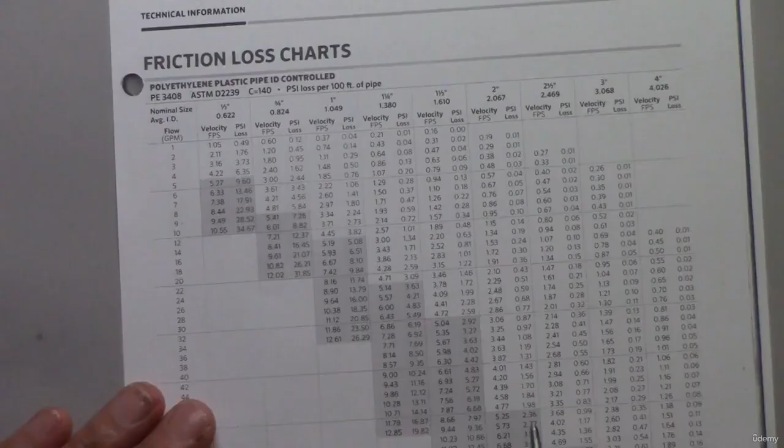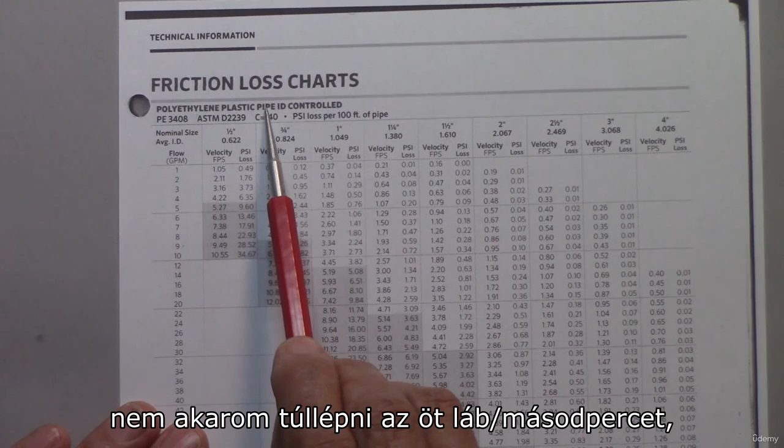Okay, let's look at these charts. So here we have a friction loss chart, and this is for polyethylene plastic pipe, or just drip tubing. What this is telling me is what I can do as far as velocities. I don't want to exceed 5 feet per second, and what my PSI losses are.

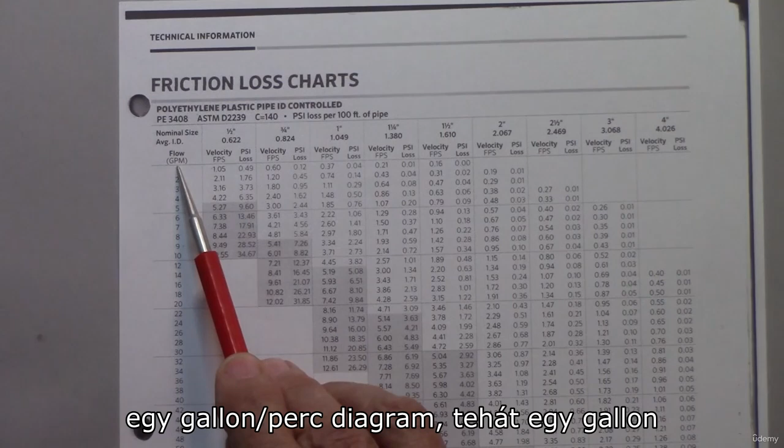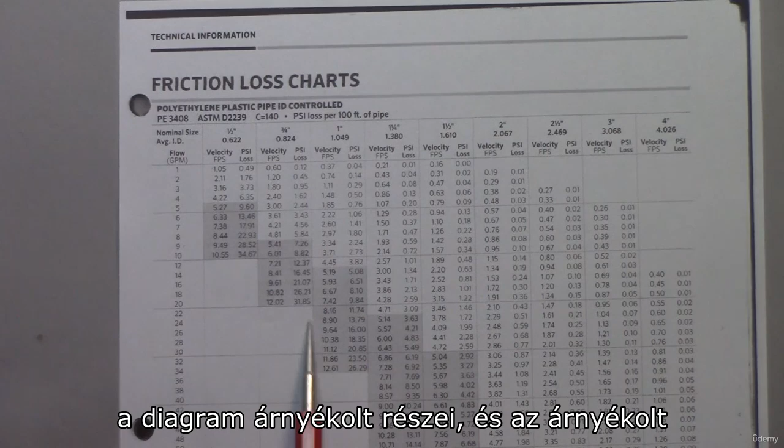So with 1/2 inch tubing, here on the left-hand side, I've got a flow in gallons per minute chart. So 1 gallon per minute all the way down the line. I also have a stair-stepped area of shaded portions of this chart, and that shaded area represents areas where we are exceeding 5 feet per second velocity.

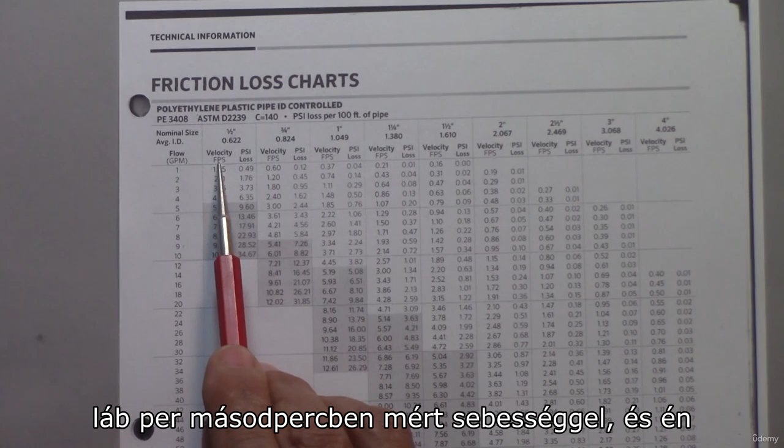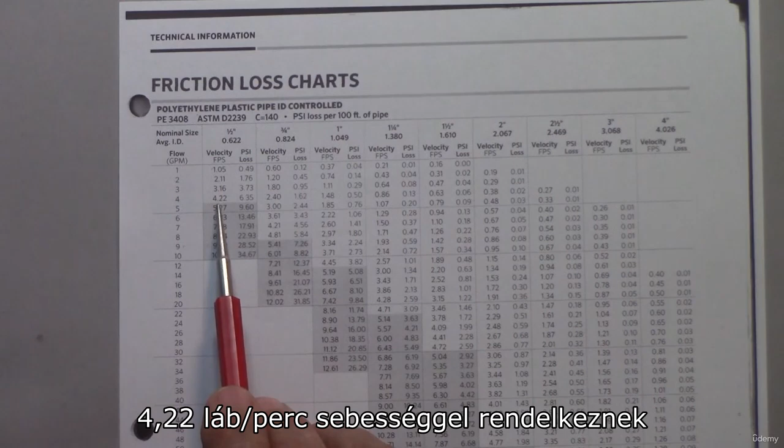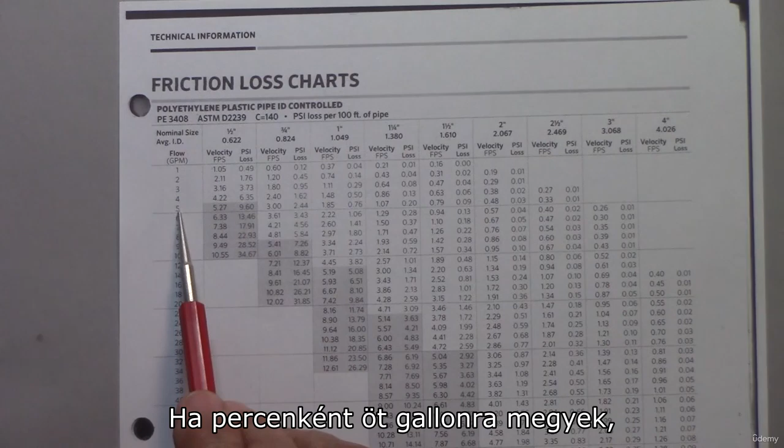So with a 1/2 inch pipe, I've got a velocity in feet per second column, and I've got a PSI loss column as well. If I'm running 4 gallons per minute, which is 240 gallons per hour, I'm going to have a velocity of 4.22 feet per second and a PSI loss of 6.35, and that loss is per 100 feet of pipe. If I go to 5 gallons per minute, I'm exceeding my velocity, so I can't go there.

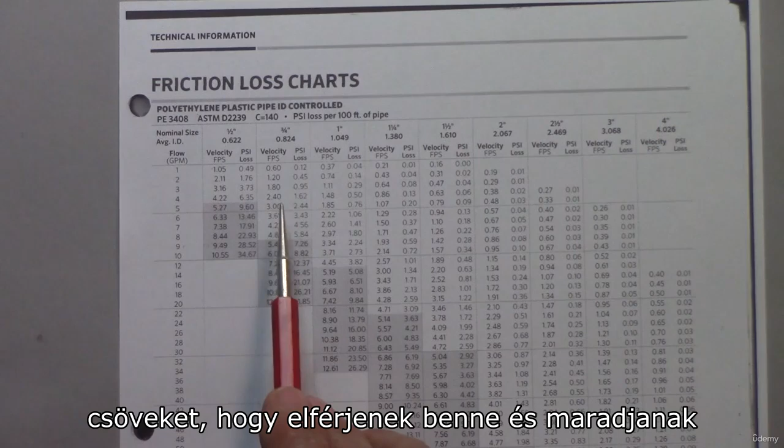If I want to have more than 5 gallons a minute, then I'm going to have to jump to a 3/4 inch drip tubing in order to accommodate that and stay within our design criteria.

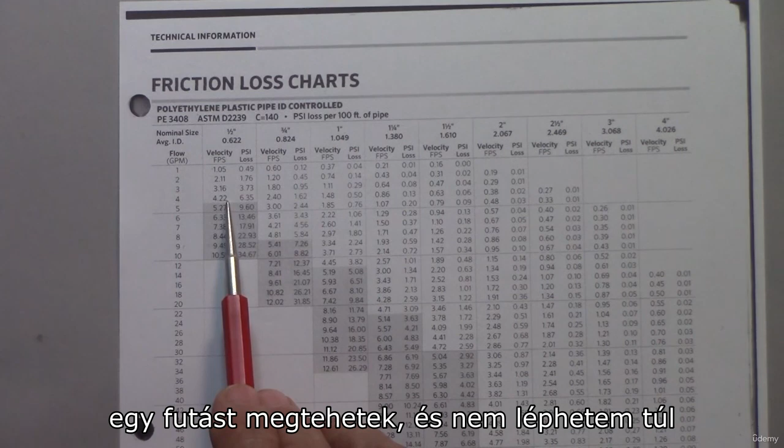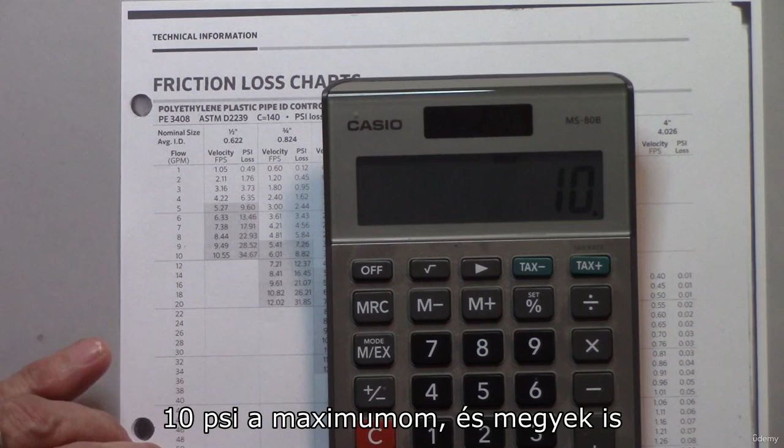So if I'm pushing 4 gallons per minute or 240 gallons per hour, how long of a run can I do and not exceed or max out my 10 psi loss? Well, I'm going to take my calculator. 10 psi is my maximum, and I'm going to divide that by, at 4 gallons per minute, a psi loss of 6.35.

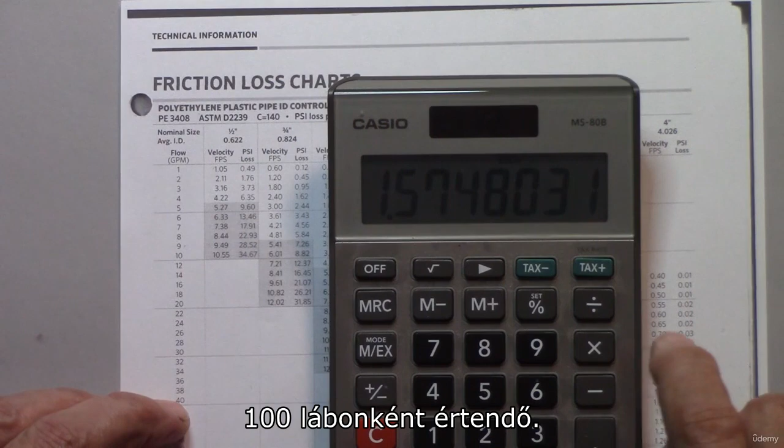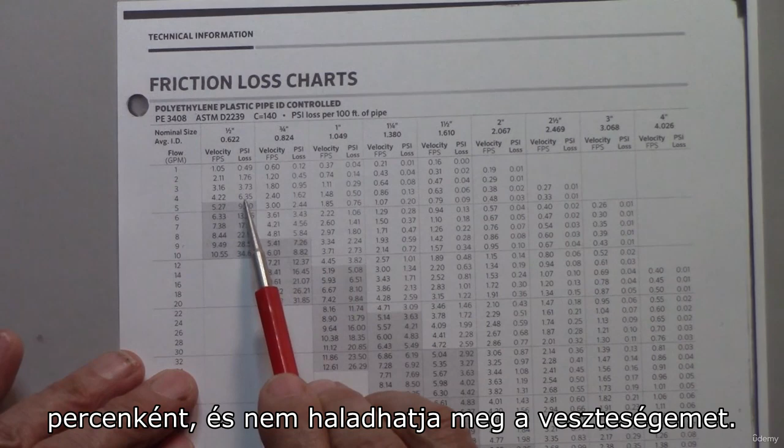It gives me a value of 1.57, but remember, this is per 100 feet. I multiply that, I can run 157 feet at 4 gallons per minute and not exceed my loss. So that would be the maximum I could do at 4 gallons a minute with 1/2 inch piping.

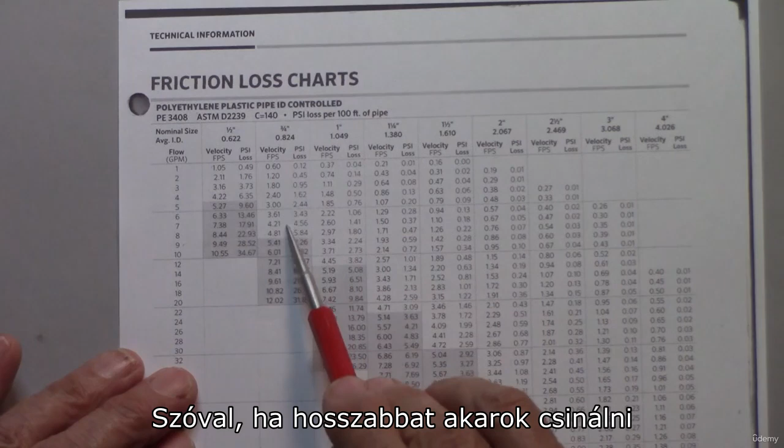So if I want to do a longer run, I'm going to have to go up to a 3/4 inch pipe.

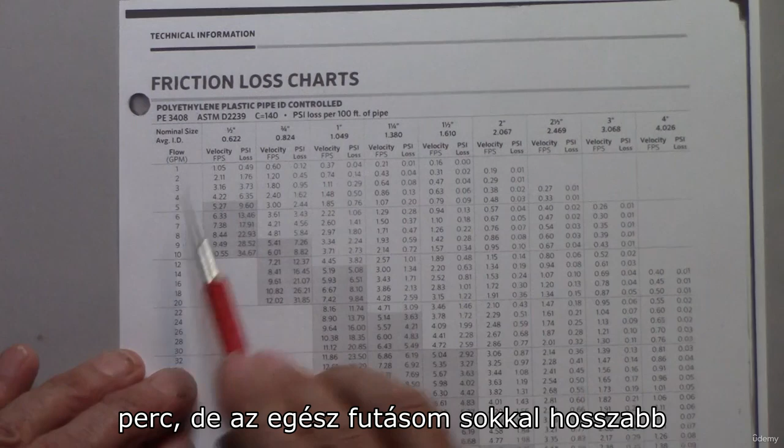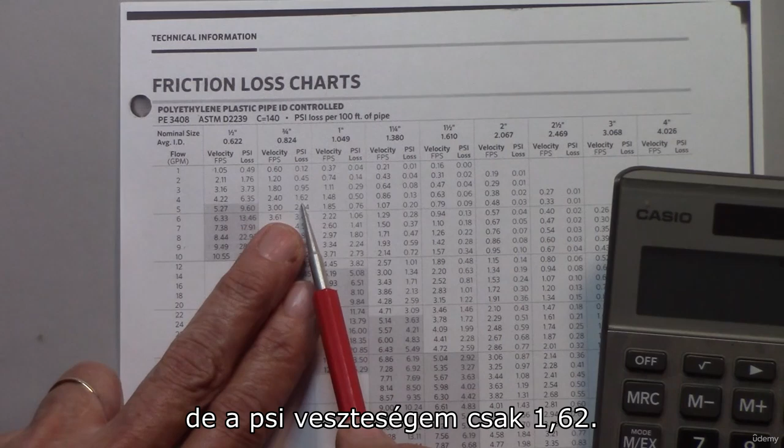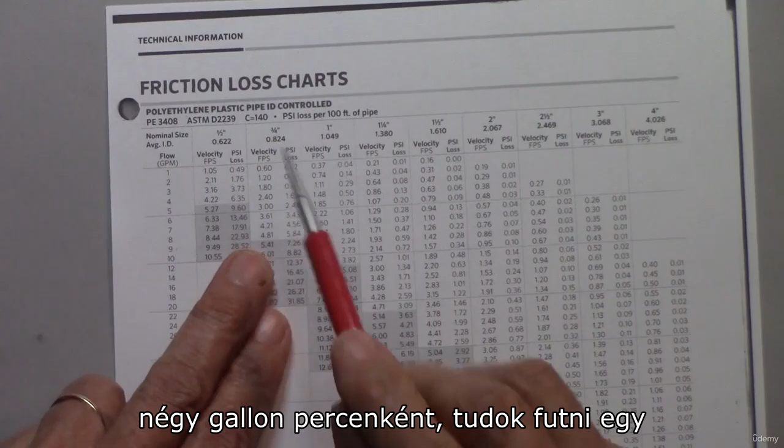So let's say I'm pushing 4 gallons a minute, but my whole run is much longer than 157 feet. Well, at 4 gallons a minute on 3/4 inch line, my velocity is 2.4, but my PSI loss is only 1.62. If I do the math again, 10 divided by 1.62 times 100, I can run a 3/4 inch line 600 feet, almost 620 feet, and I'm going to be fine as far as my friction loss is concerned and putting my system together.

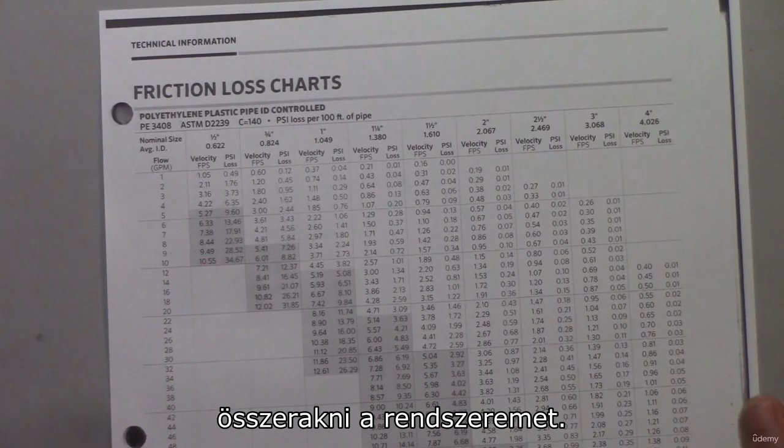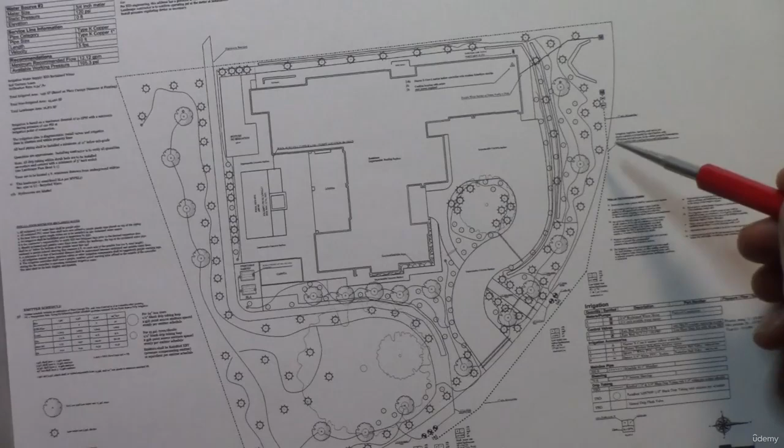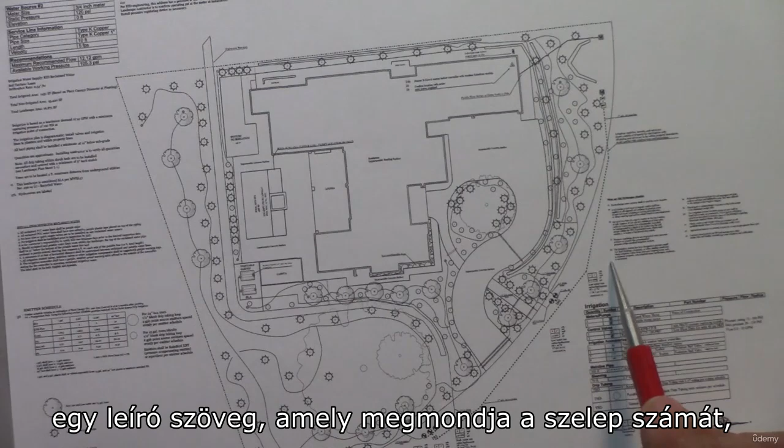I've got a 1-inch Schedule 40 main line shown coming out. I've got 5 valves depicted by these little semaphores, and my maximum gallon per minute flow rate is 4.37 gallons per minute. So near each of the valves, I've got some descriptive text that says the valve number, the valve size, and what the gallon per minute flow rate is.

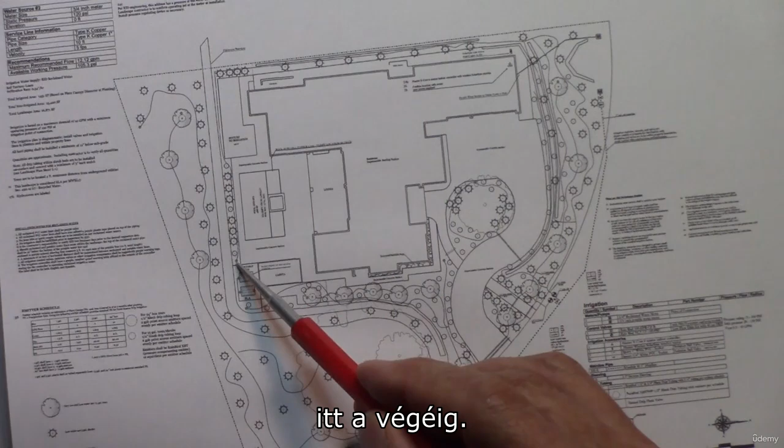So if I need to size this, now this little line coming out represents my drip tubing. And this drip tubing comes all the way around, all the way down, and down to the end here. That measures 331 feet. So I've got 331 feet and 4.37 gallons per minute.

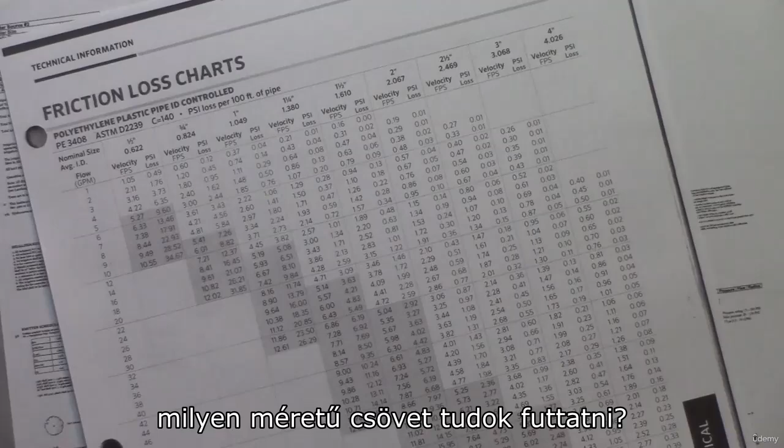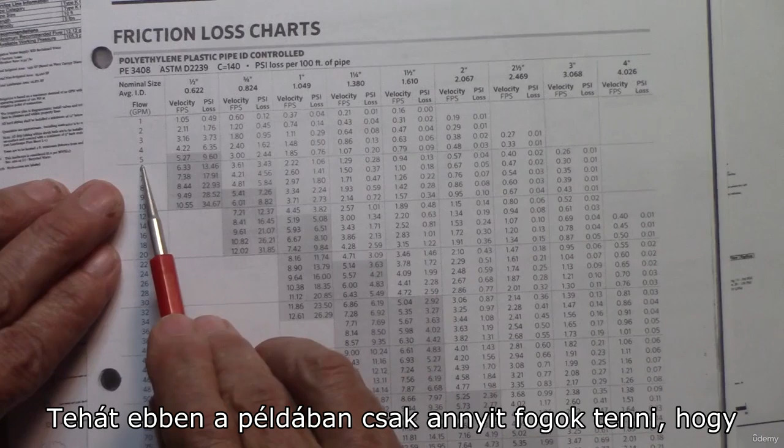So I need to be able to determine what size tubing I can run. Well, I'm over 4 gallons a minute. I'm at 4.37, almost 5. So for this example, I'm just going to say 5 gallons a minute. If I'm running 5 gallons a minute, then I'm going to have to go to 3/4 inch piping.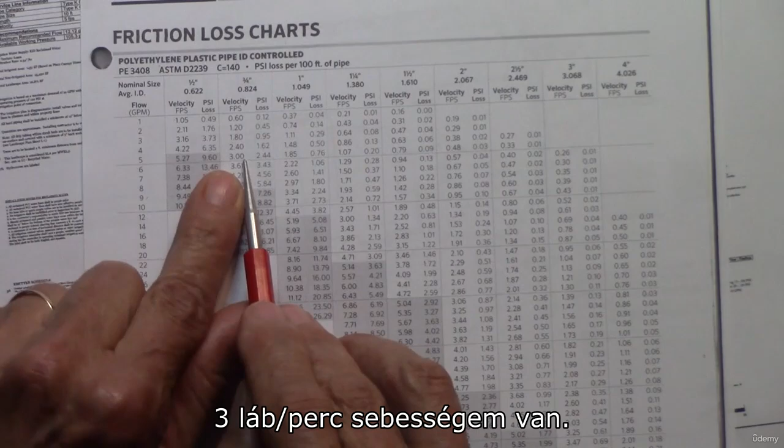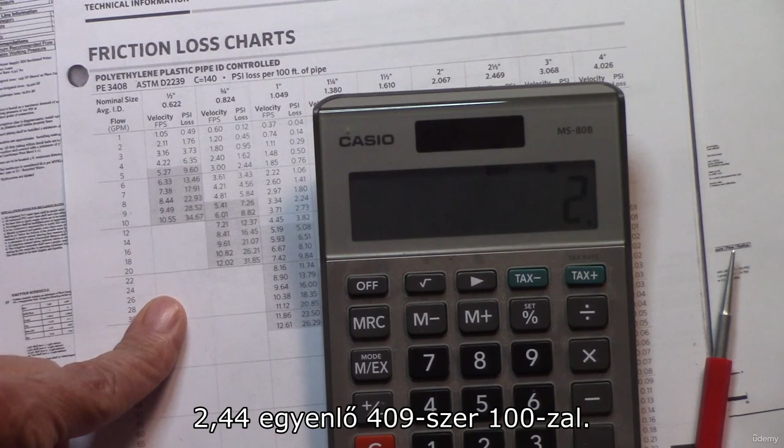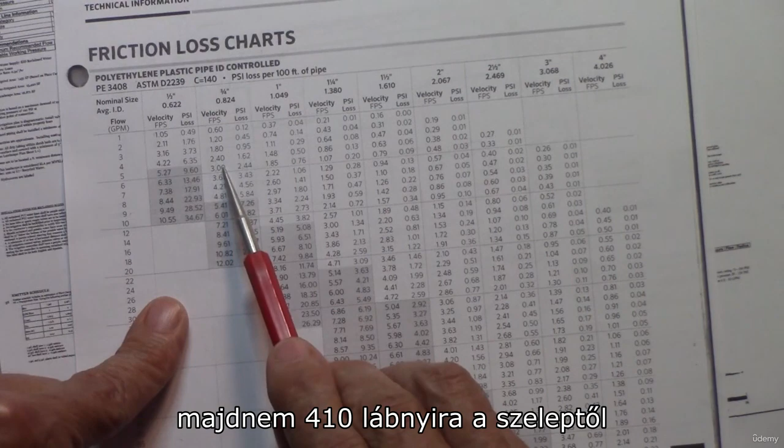I've got a velocity of 3 feet per second. My PSI loss is only 2.44. So again, I'm going to go 10 divided by 2.44 equals 409, times 100. I can run my 3/4 inch line almost 410 feet from valve all the way to the end, and I'm not going to exceed my PSI loss.

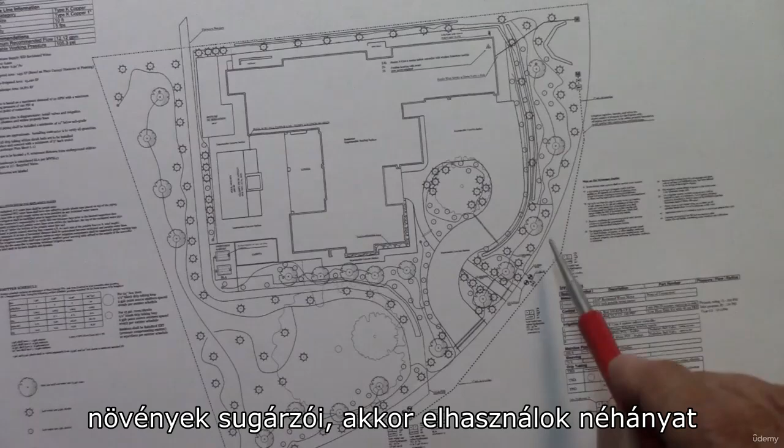My velocity is going to be fine, and technically, as this line is going out into the landscape, every time I put drip emitters at plants, then I'm using up some of that 4.37 gallons per minute. So it's dropping as I go out. At some point, if I really wanted to, I could just shift this over to 1/2 inch line because I wouldn't be pushing that much more water.

From a practical standpoint, if you've got 3/4 inch piping, run it out there, take your 1/4 inch tubing off of that, do your drip emitters per the schedule, and you're going to be fine.

But this is how you can determine how long of a run you can do based on what your flow rate is. So you're going to have to add up what your flow rates are, figure out your gallon per hour, but then do the math, divide that out so you know how many gallons per minute you're pushing into the landscape. Then go to this friction loss chart, and you should be able to say, I've got this many gallons per minute, and if I don't want to exceed 5 feet per second, or I don't want to be marginalizing this, I'm going to kick it up to the next larger size.

And there is 1 inch drip tubing available as well. Typically, 1/2 inch and 3/4 inch is going to be more than adequate for anything that you need to do. So hopefully that's going to help clarify this a little bit.